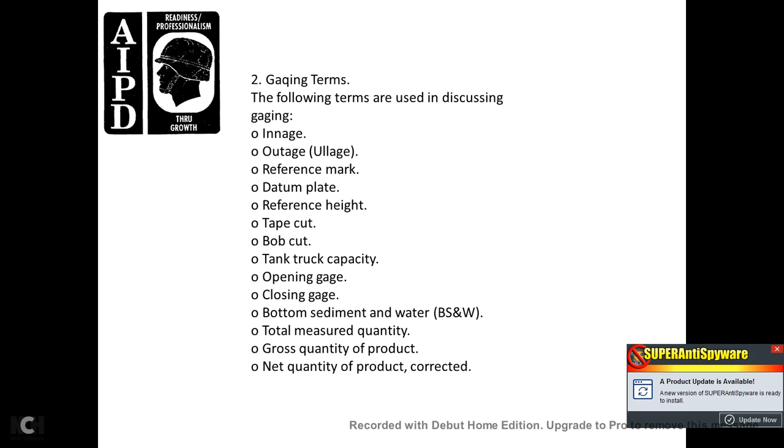The innage is the depth or height or volume of the product in the tank, measured by the gauge from the surface of the product to the bottom of the tank.

Outage or ullage. The outage or ullage is the measurement of the free space above the surface of the product in a tank, extending to the reference mark.

The reference mark is a horizontal line put on the rim of the gauging hatch on the tank, representing the fixed point from which the measurement is made.

The datum plate is a level metal plate on the tank bottom directly under the reference mark. The plate provides a smooth, level surface for the innage bob to rest upon when taking an innage gauge.

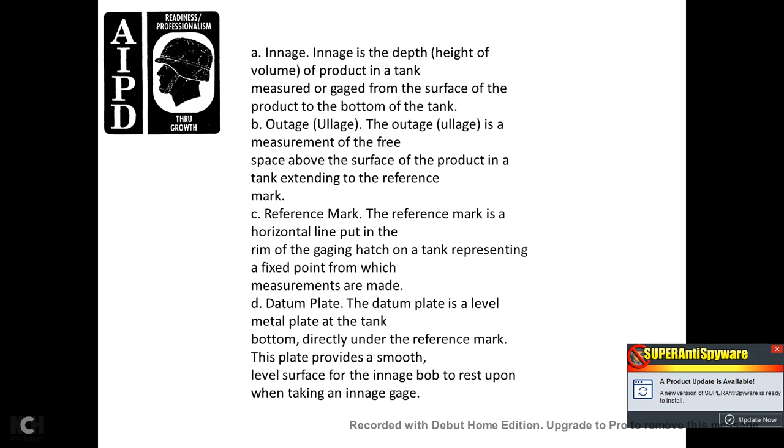Reference height. The reference height is the distance from the reference mark to the top of the datum plate. After you establish the reference height, stencil it in a conspicuous place adjacent to the gauging hatch.

Tape cut. A tape cut is the line made on the tape measuring scale by the product being measured. A bob cut is the line made on the bob by the bottom sediment and water being measured.

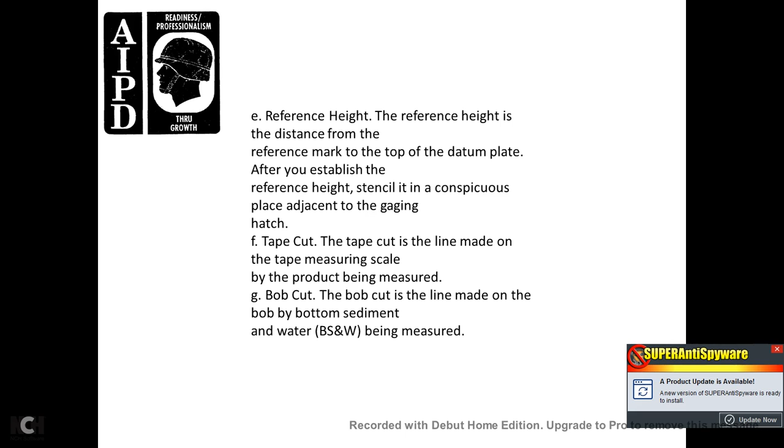Tank truck capacity. Tank truck capacity is the amount of product in the vehicle where the product reaches the adjustable marker installed beneath the dome of each compartment. Adjust the marker in relation to the type of movement, whether highway or cross country.

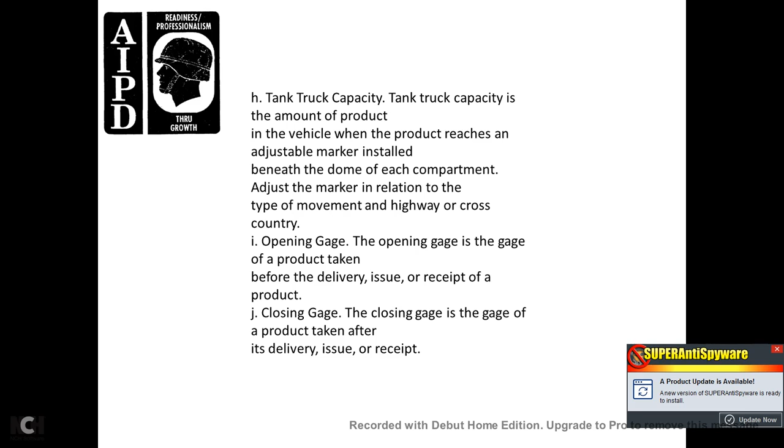Opening gauge. The opening gauge is the gauge of the product taken before delivery, issue, and receipt of the product. Closing gauge is the gauge of the product taken after delivery, issue, and receipt.

Okay, the bottom sediment and water. Bottom sediment and water, BS&W, is the amount of sediment and water measured in the bottom of the tank.

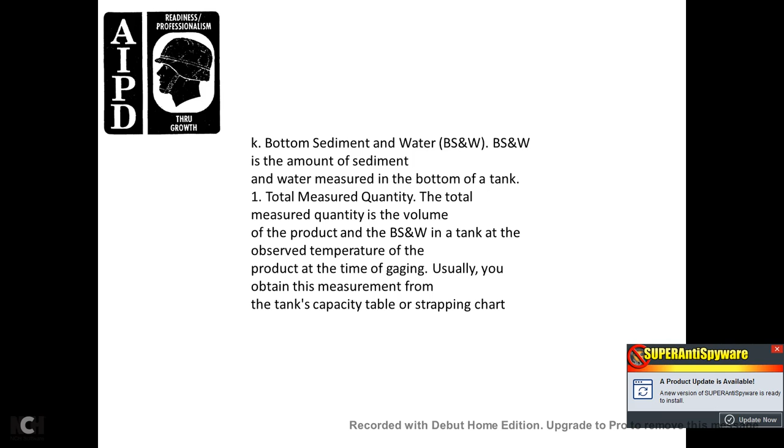The total measured quantity is the volume of the product and the bottom sediment and water in the tank, at the observed temperature of the product, at the time of the gauging. You usually obtain this measurement from the tank's capacity table or strapping chart.

Engineers develop tank strapping charts when they construct tanks. Simply, strapping charts are conversion tables that convert linear measures taken from the tape and the bob into readings of equivalent volume amounts. No two storage tanks have identical strapping charts, because tanks of the same size vary in capacity.

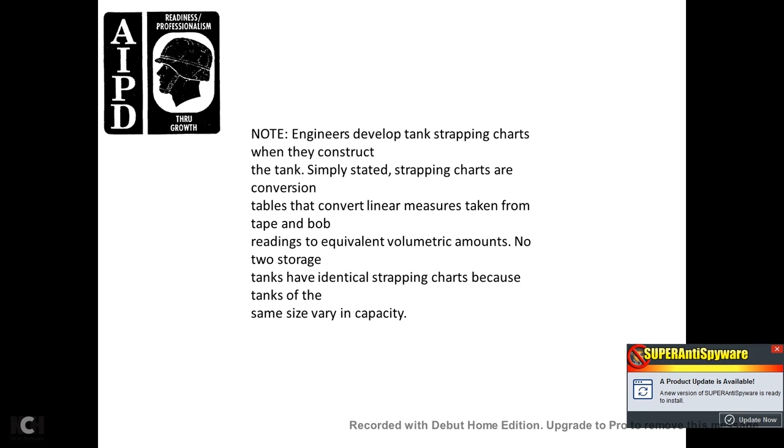Gross quantity of product. The total measured quantity minus the bottom sediment and water is the gross quantity of product, also known as the net quantity of product uncorrected. The net quantity of product corrected.

The net quantity of the product corrected is the total measured quantity of the product minus the bottom sediment water, and the observed temperature converted to an equivalent quantity of 60 degrees.

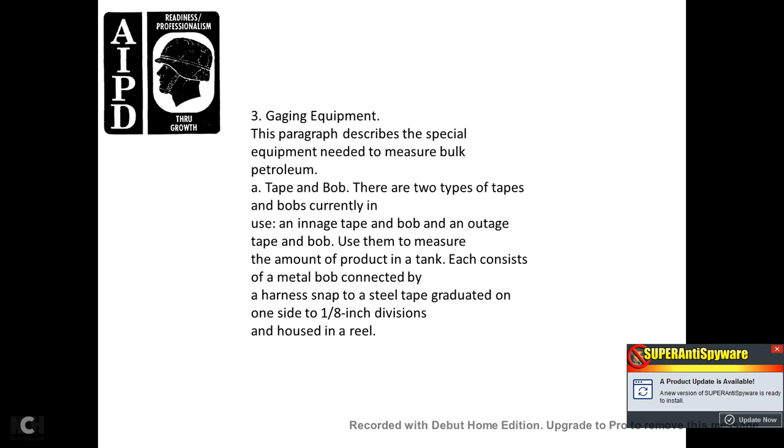Gaging equipment. This describes the special equipment needed to measure bulk petroleum: tape and bob. There are two types of tapes and bobs currently used: an innage tape and bob, and an outage tape and bob, used to measure the amount of product in a tank. Each consists of a metal bob connected by a harness snap to a steel tape, graduated on one side to 1/8 of an inch, with divisions housed in a reel.

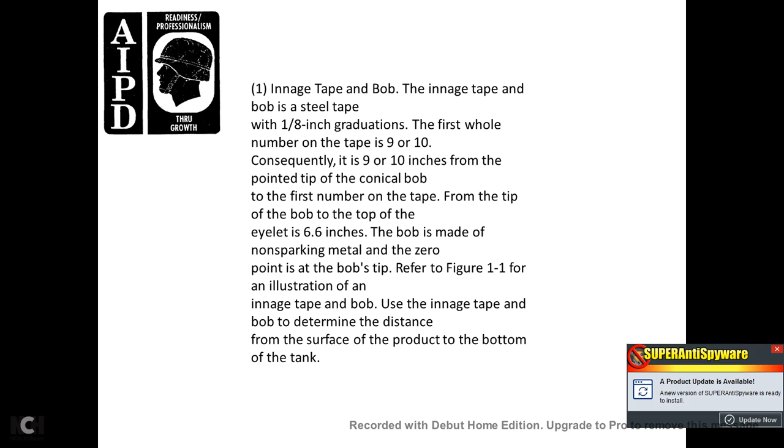The innage tape and bob. The innage tape and bob is a steel tape with 1/8 of an inch graduations. The first whole number on the tape is 9 or 10 inches from the pointed tip of the conical bob. The first number of the tape from the tip of the bob to the top of the eyelet is 6.6 inches. The bob is made of non-sparking metal, with the zero point at the bottom of the bob's tip. Refer to Figure 1-1 for an illustration of the innage tape and bob. It is used to determine the distance from the surface of the product to the bottom of the tank.

Here you see the innage tape, with the handle and crank, and the bob, which is 10 inches from the top of the tape, along with the bob, the eye, and the harness snap.

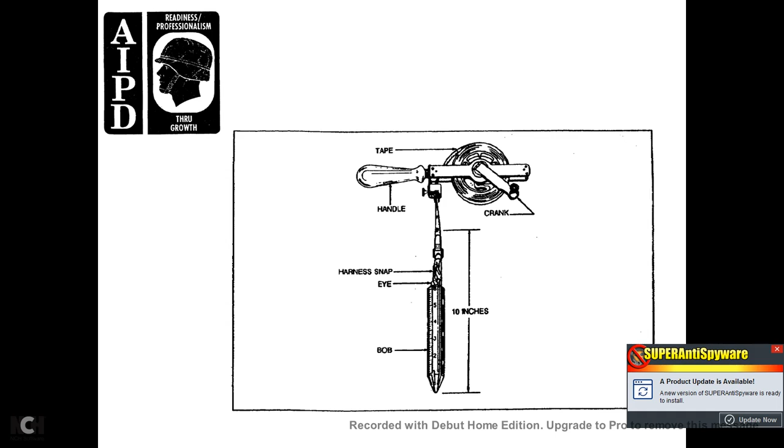Outage tape and bob. The outage tape and bob, shown in Figure 1-2, looks similar to the innage tape, except the readings are at the 3-inch level on the tape. The zero reference is where the harness snap connects to the bottom of the 6-inch long rectangular bob, graduated in 1/8 of an inch, starting with the 6-inch mark at the bottom, and reading upward to 1 inch past the last whole number on the tape at the top. The outage bob has a flat nose and is made of non-sparking metal.

Use the outage tape and bob to determine the distance from the surface of the product to the top of the tank.

Here your outage tape shows the handle, the tape, and the crank, with the bob 7 inches, then the eye, and then 3 inches from the eye to the tape, with the harness snap marking 0 inches.

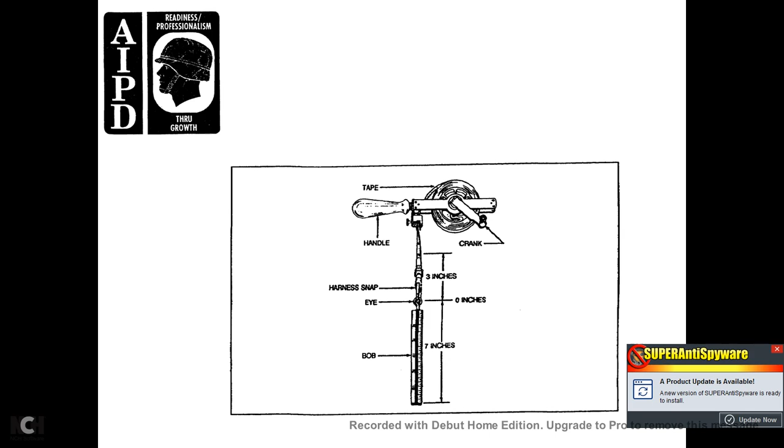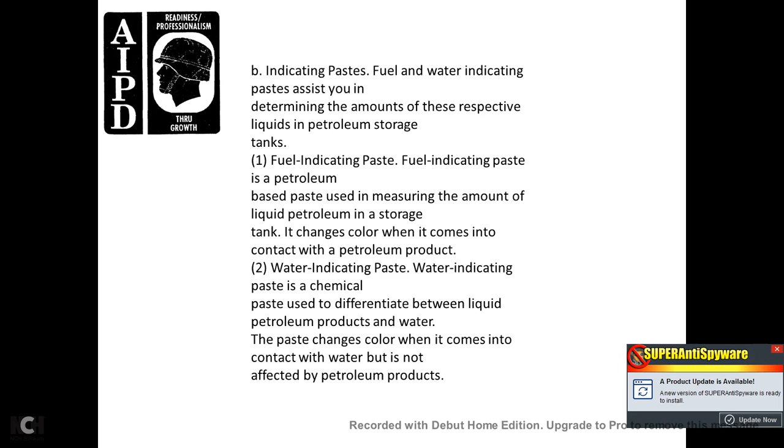Indicating paste. Fuel and water indicating paste is used to determine the amount of respective liquid in petroleum storage tanks. Fuel indicating paste is a petroleum-based paste used in measuring the amount of liquid petroleum in the storage tank; it changes color when it comes in contact with the petroleum product. Water indicating paste is a chemical paste used for differentiating between liquid petroleum products and water. The paste changes color when it comes in contact with water, but is not affected by petroleum products.

Gaging sticks are used to gauge tank cars, and tank vehicles. The tank car gauge stick is a varnished piece of wood or other corrosion-resistant material, approximately 3 feet long, used for outage gauging of tank cars. The stick has two scales graduated in 1/8 of an inch divisions, with a common zero 12 inches from the lower end. Attached to the stick is an angle; when you place the stick with the angle resting on the upper side of the tank car shell, the zero scale coincides with the underside of the shell.

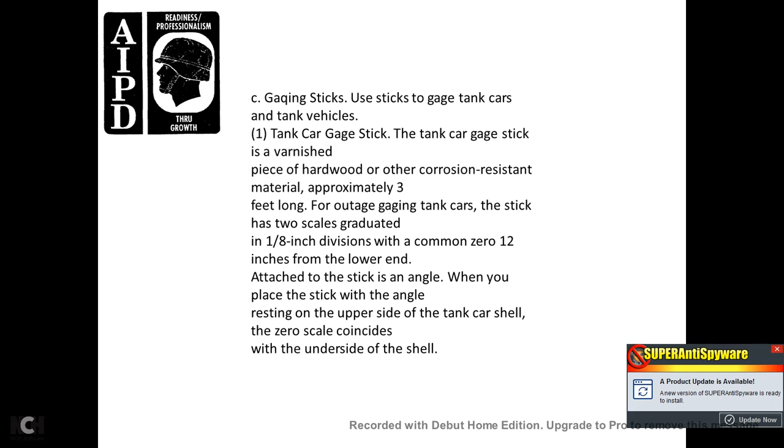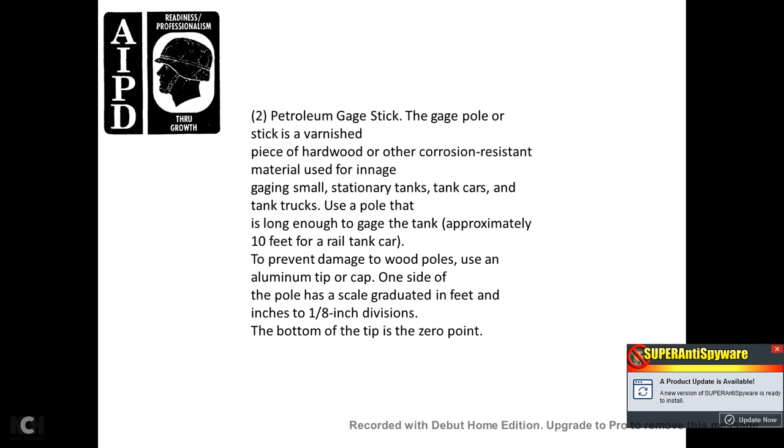The petroleum gauge stick, or gauge pole, is varnished wood or other corrosion-resistant material, used for innage gauging small stationary tanks, tank cars, and tanker trucks. It is a pole long enough to gauge the tank, approximately 10 feet for a railway tanker car. To prevent damage to the wood, an aluminum tip cap is used. One side of the pole is scaled, graduated in feet and inches to the 1/8 of an inch division, with the bottom of the tip as the zero point.

The tank vehicle gauge stick: each tank vehicle has its own gauge stick, graduated in 25-gallon divisions instead of feet and inches. When the product level falls between gallon divisions, you interpolate.

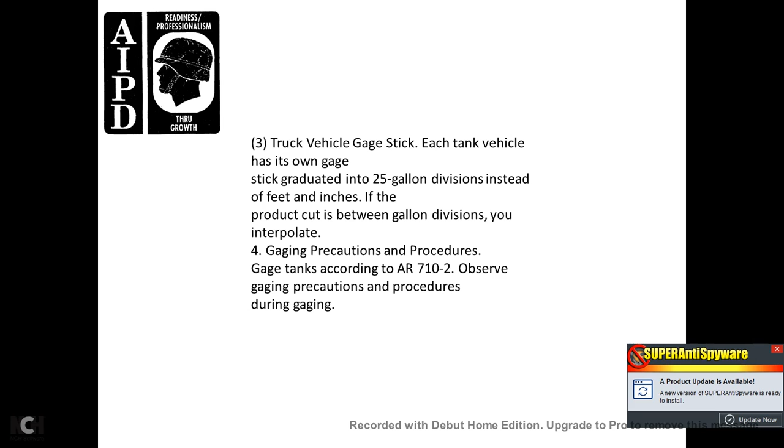Gaging precautions. Procedures for gaging tanks are according to AR 710-2. Observe gaging precautions and procedures during gaging.

Follow the precautions for gaging bulk storage tanks before and after any receipt, issue, or transfer operation. Ground the static electricity by touching the bare hand to the tank shell and handrail before climbing the tank and before performing a gauge. Open the gauge hatch to allow vapors to escape. Do not stand on the roof of the tank when gaging. Perform the gauge from the side of the gauge hatch which has the wind to your back, if possible. Be careful not to breathe the vapors from the contents of the tank.

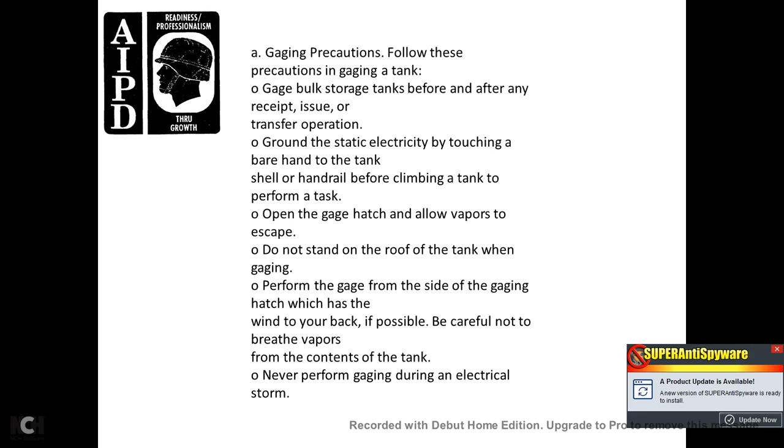Never perform gauging during an electrical storm. Require gauge personnel to stand at the same location on the roof for both the opening and closing gauges if they must gauge while standing on the tank's roof.

Perform and record gauging to the nearest 1/8 of an inch. Repeat the gauging until you get two identical readings. Be certain that the tape touches the rim of the gauge hatch at all times to ground static electricity during the gauging process. Wipe the tape clean and dry after use.

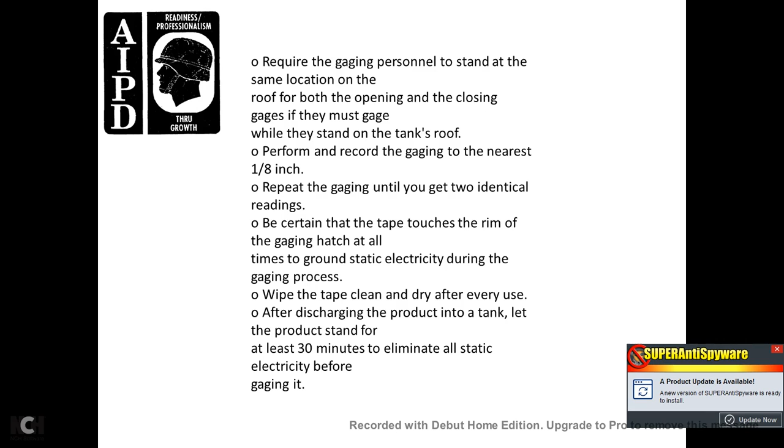After discharge of product into a tank, let the product stand for at least 30 minutes to eliminate static electricity before gauging it. Take the product temperature reading for volume correction before and after receiving or issuing volumes of 3,500 gallons or more, using the same tape and bob for opening and closing gauges.

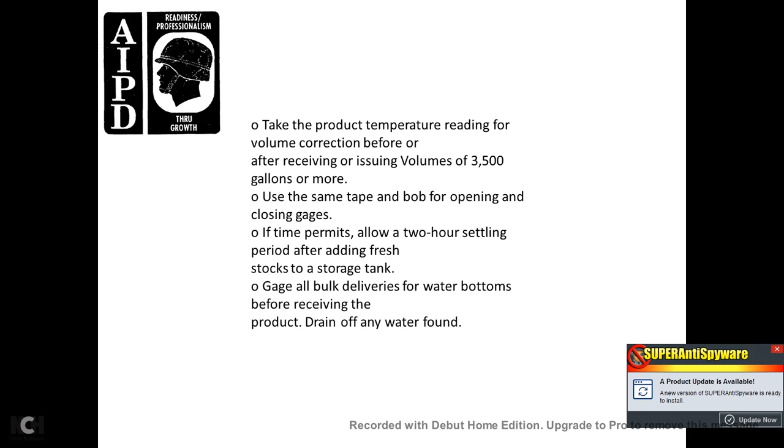If time permits, allow a 2-hour settling period after adding fresh stock to a storage tank. Gauge all bulk deliveries for water bottoms before receiving the product, and drain off any water found.

Innage gauging: using an innage tape and bottom bob to obtain the height of the product in the tank. Follow these steps to perform innage gauging using an innage tape and bob. This method directs gauging of atmospheric or other non-pressure tanks.

Raise the appropriate hatch cover. Locate the reference point shown in Figure 1.3, marked as point A. Apply the water-indicating paste to the bob, not the graduation portion.

Apply the product-indicating paste to the tape at the level of the product in the tank, applying it thinly along the graduated side of the tape. Ensure you hold the ungraduated side of the tape in contact with the metal rim of the gauging hatch at the reference point as you lower the tape into the tank.

This shows the innage tape going in at the reference point at the top of the lid, following the innage tape with the product tape cut. Product level aligns with reference height: A, B, and C represent the bottom, with B being the product level and A the reference point at the top.

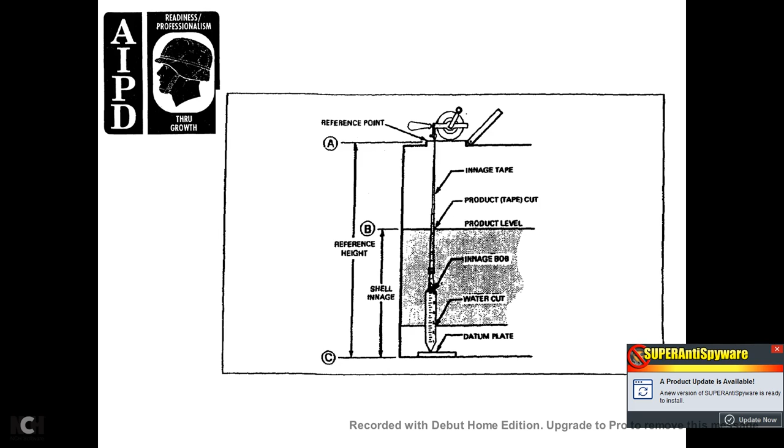Following the innage tape to where the product cuts the tape at the product level, lower the bob and tape into the tank until the tip of the bob just touches the tank bottom or datum plate, at the horizontal plane of point C.

If you lower the tape too far, the bob tilts and you obtain an incorrect reading. Compare the tape reading to the reference point A in Figure 1.3, to the reference height.

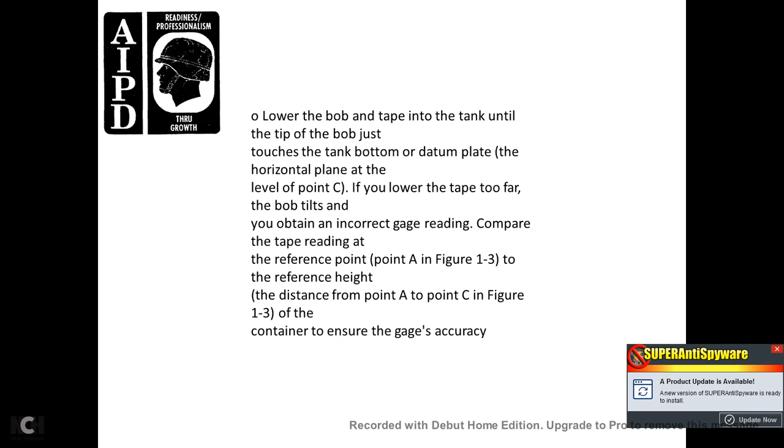Compare the tape reading to the reference point A in Figure 1.3 to the reference height, the distance from point A to point C in Figure 1.3 of the container, to ensure gauge accuracy.

Withdraw the tape after 30 seconds and read and record the product tape cut on the innage gauge. Read and record the water cut on the bob for bottom sediment and water.

Ensure you obtain identical readings to gain accurate measurement using the same gauge and gauging the hatches, obtaining the opening and closing gauges. Be sure to lower the tape to the same depth on both gauges.

The outage gauge method: when gauging barges, tankers, or tank cars, also use the outage gauge method to obtain the amount of ullage space remaining in the tank. You should use all safety precautions.

You may use this method on a storage tank when necessary to get an outage or ullage measurement, using an outage tape or bob. Follow these steps.

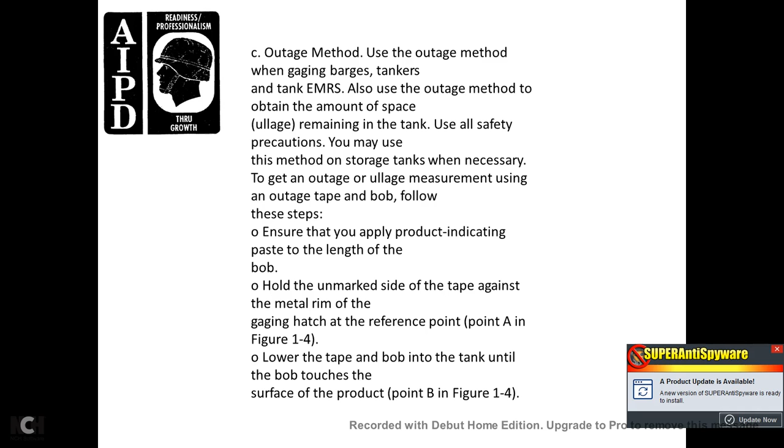Ensure that you apply the product-indicating paste along the bob. Hold the unmarked side of the tape against the metal rim of the gauging hatch at the reference point A in Figure 1.4. Lower the tape and bob into the tank until the bob touches the surface of the product at point B in Figure 1.4.

Wait until the bob is motionless. Lower the tape slowly until the bob is 2 or 3 inches below the product surface at point B, as shown in Figure 1.4, penetrating the product surface. Record the reading of the tape at the reference point A in Figure 1.4.

Add the bob reading to the tape reading to get the outage gauge. Subtract the outage gauge from the reference height of the tank to get the converted outage gauge into the inch gauge.

Follow the example shown for how to perform this step. Example: using 1/4 inch readings, the tape reading at reference point is 21 feet 6 inches, the bob reading is plus 3 3/4 inches, and the outage gauge is 21 feet 9 3/4 inches.

That gives plus 3 3/4 inch bob reading. All right, you have your

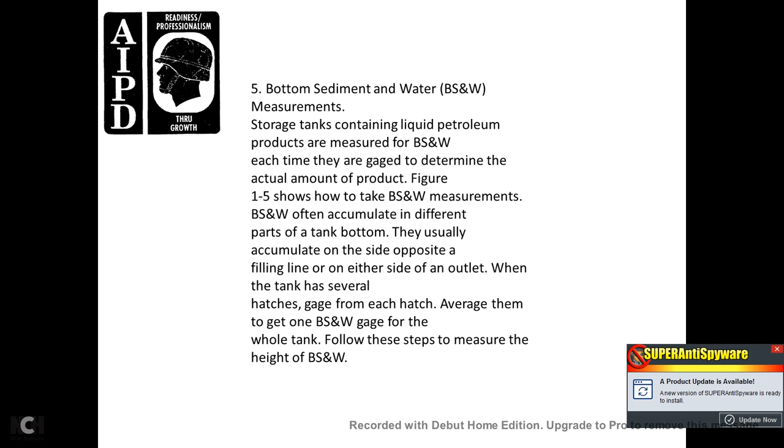They usually accumulate on the side opposite the filling line, or on either side of the outlet. When the tank has several hatches, gauge from each hatch and average them to get the bottom sediment water gauge for the whole tank. Follow these steps to measure the height of the bottom sediment water.

Use the water indicating paste to determine the water. Put a thin, even coat of paste on the part of the bob that touches the point where the water and product meet. Be careful not to put on too much, as this can cause a false reading.

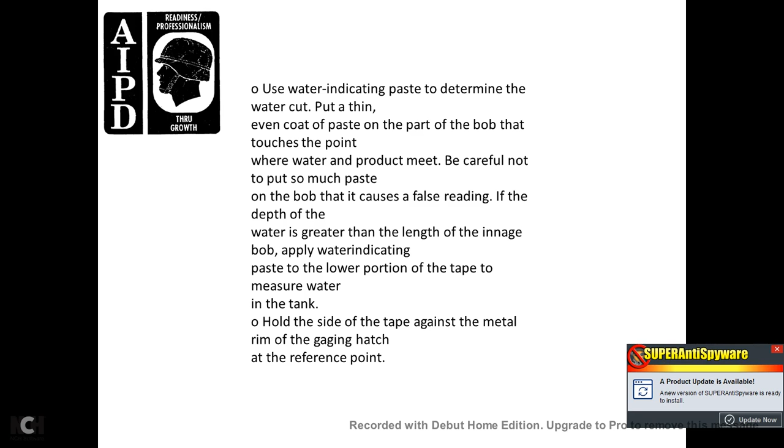If the depth of the water is greater than the length of the innage bob, apply the water indicating paste to the lower portion of the tape. Measure the water in the tank. Hold the side of the tape against the metal rim of the gauging hatch at the reference point.

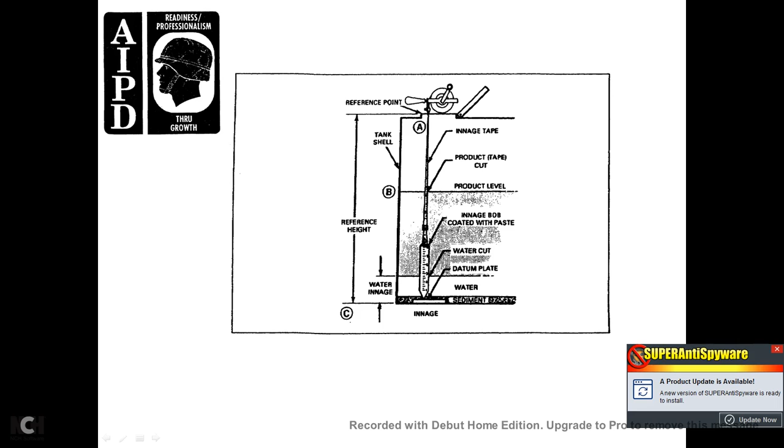From A to B, you have the innage tape, the product tape cut, the product level. From B to C, you have the water innage, sediment and water, and your water measurement from the datum plate on the gauge, coated with paste showing the water cut. And then to the product level, if there is any water past the bob, then coat the tape.

Lower the tape or bob into the tank until the bob is near the distance of the bottom. Determine this by comparing the length of the unwound tape with the reference height of the tank.

Unwind the tape slowly until the tip of the bob touches the bottom of the tank's datum plate. Do not let the bob rest on a rivet or other obstruction. Do not lower the tape so far into the tank that the bob tilts, causing an incorrect reading.

Keep the tape and bob in the gaging position at 5 to 10 seconds for kerosene, gasoline, or other light products, and 15 to 30 seconds for heavier products. When removing the tape and bob from the tank, the bob surface in the water should show discoloration. Record the water cut as the bottom sediment and water.

Temperature matters because the volume of petroleum products increases and decreases with temperature change. An accurate measurement of the temperature of the product is taken when you gauge it, so you can correct the measured quantity to the standard temperature of 60 degrees Fahrenheit, for volumes over 3,500 gallons.

When gauging large quantities, you take temperature readings at various levels to average and determine the true temperature of the product. Figure 1.6 shows the number of readings necessary and the levels at which to place the tank thermometers. For a product depth of more than 15 feet, the minimum number of temperature measurements is three: 3 feet below the surface, the middle of the product, and 3 feet above the bottom.

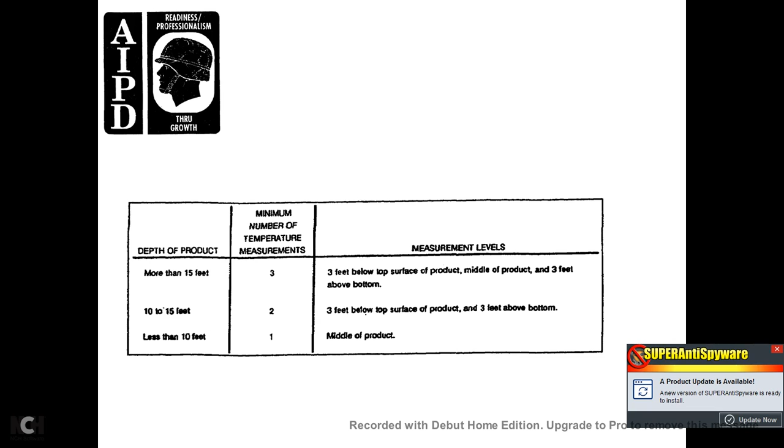For a depth of 10 to 15 feet, the minimum number of temperature measures is two: 3 feet from the surface of the product and 3 feet from the bottom. For less than 10 feet, take one temperature reading from the middle of the product.

Use the cup case thermometer to measure the temperature of the product in the storage tank. The thermometer is attached to a hardwood backing, with the bulb of the mercury column extended within the cup base. When filled with liquid of the product being measured, the cup case minimizes fluctuation of the reading.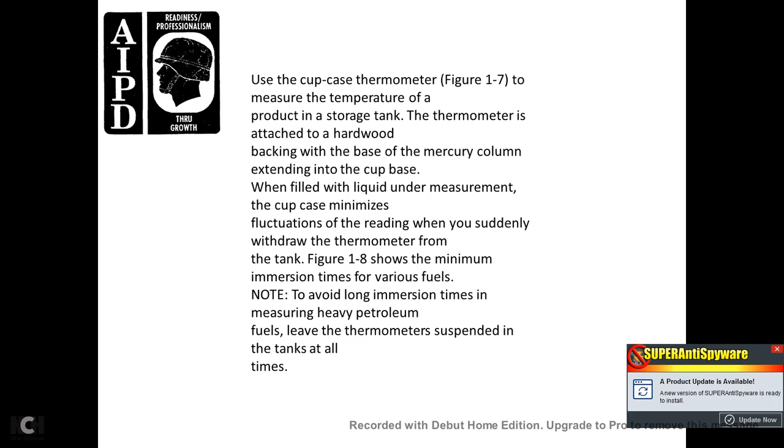When suddenly withdrawn from the tank, Figure 1.8 shows the minimum immersion time for various fuels. To avoid the long immersion time when measuring heavy petroleum fuels, leave the thermometer suspended in the tank at all times. Follow these procedures whenever you're measuring the temperature.

Examine the mercury column of each cup case thermometer for separation, and replace any thermometer having a faulty column. Mercury separations cause incorrect readings.

Inspect thermometers for accuracy by exposing them as a group to the same atmospheric temperature and comparing the readings. Replace any thermometer with a reading that differs from the group by 1 degree Fahrenheit or more. Prove all tank thermometers against the reference standard each year.

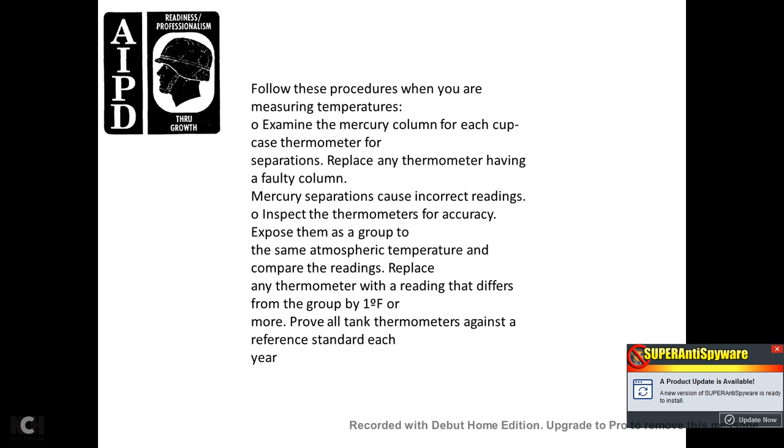This shows your cup case with the thermometer in it: approximately 16 inches, approximately 1 and 1/8 inches, and 2 inches.

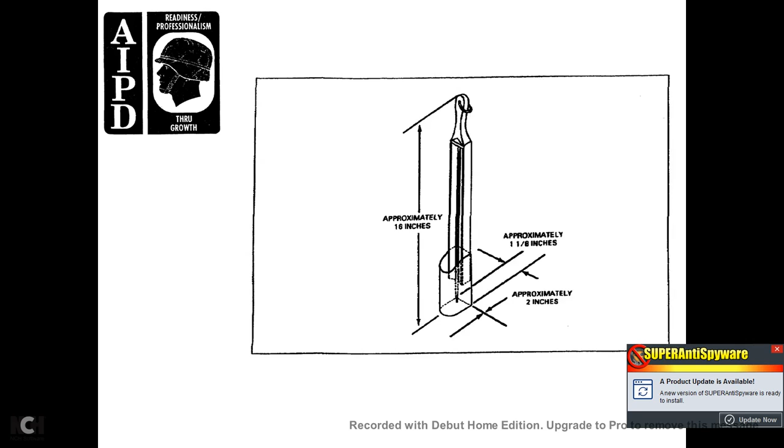For automotive gasoline, motor gas, aviation gas, kerosene, diesel fuel, jet fuel, and grades 1 and 2 burner fuels, it takes 5 minutes. For grades 4, 5, and 6 Navy special burner fuels, it takes 15 minutes. This conforms to Table 4, minimum immersion time of the cup case, API standard 2543, ASTM designation D1086.

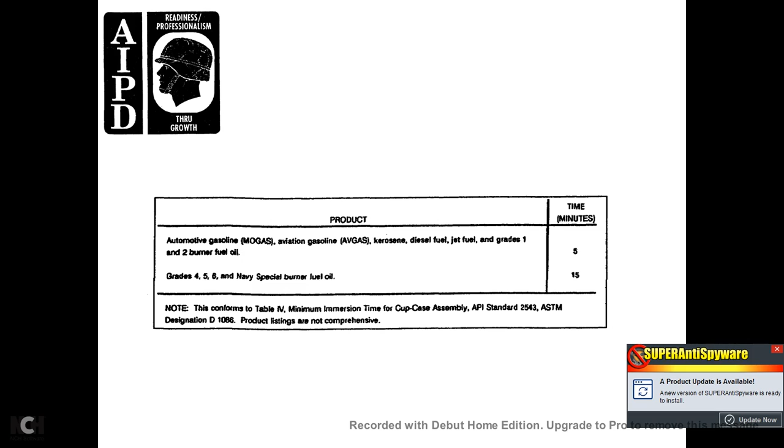Using Figure 1.6 to determine the minimum number of readings and measurement levels required for the operation, find the true average temperature of the product. Attach the thermometer to the end of the gauge tape with a chain or cord.

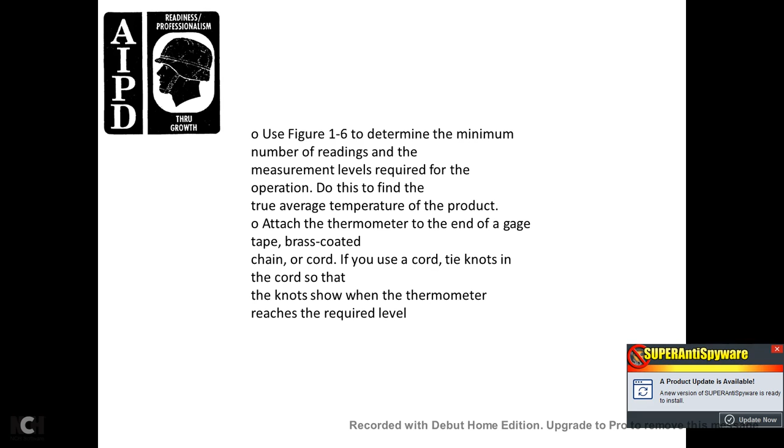Tie knots in the cord so that the knots show whenever the thermometer reaches the required level. Lower the thermometer to the required level and leave it there for the amount of time shown in Figure 1.8.

Then take the thermometer out of the tank and read it at once. Shelter the cup below the hatch to reduce temperature change caused by the wind and atmosphere when you withdraw the full cup of the product from the tank. When taking the reading, do not spill it.

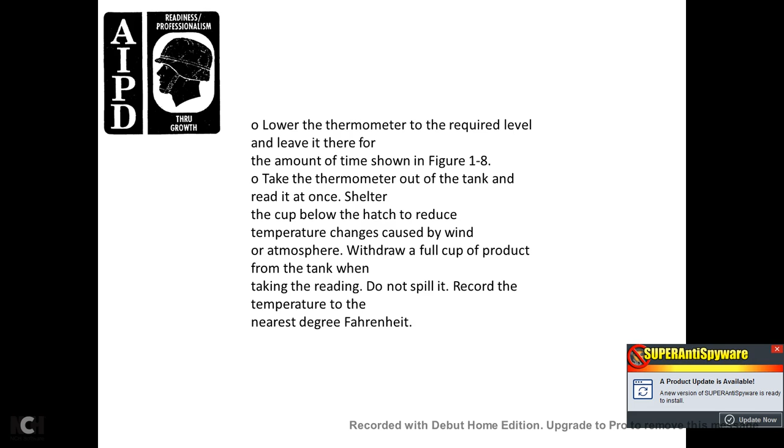Record the temperature to the nearest degree Fahrenheit. When gauging large quantities, take several temperature readings at various depths, then divide the sum of the readings by the number of readings to get the true average temperature of the product.

For example, assume the tank contains 20 feet of product. Take temperature readings at 3 feet below the top surface of the product, at the middle of the product, and at 3 feet above the bottom. Assume your readings are 82, 81, and 80 degrees Fahrenheit.

Divide the sum of these readings by 3, the number of readings, to get the average true temperature of the product: 82 plus 81 plus 80 equals 243, divided by 3 is 81 degrees Fahrenheit. So 81 degrees Fahrenheit is the true average temperature of the product in the sample.

Volume calculations: perform volume calculations for quantities of fuel of 3,500 gallons or more, or for lesser quantities when directed by higher headquarters. Follow these steps to calculate volume.

Obtain the total measured quantity from the tank capacity tables. Obtain the bottom sediment and water measured quantity from the tank capacity table. Subtract the bottom sediment and water measured quantity from the total measured quantity to get the net volume of the product, uncorrected.

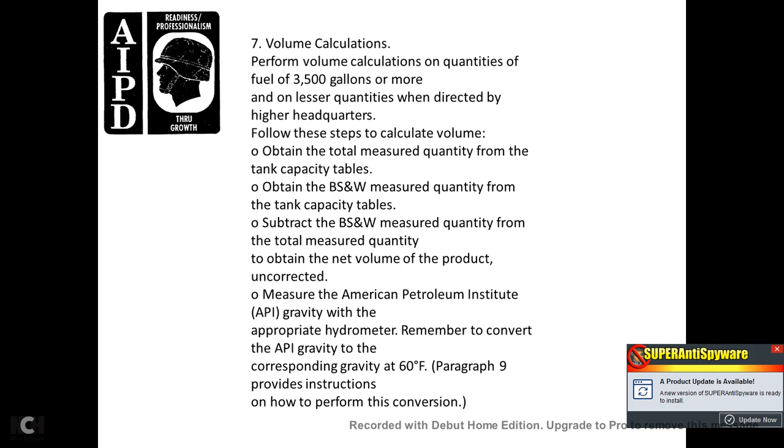Measure the American Petroleum Institute gravity of the product with the hydrometer. Remember to convert the API gravity to the corresponding gravity at 60 degrees Fahrenheit. Instructions on how to perform this conversion are found in paragraph 9.

Using the fuel classification and API gravity test procedures: draw 300 milliliters of the sample fuel, take the sample to a sheltered place to test it, shake the sample to mix it, then slowly pour the sample into a clean, dry hydrometer cylinder.

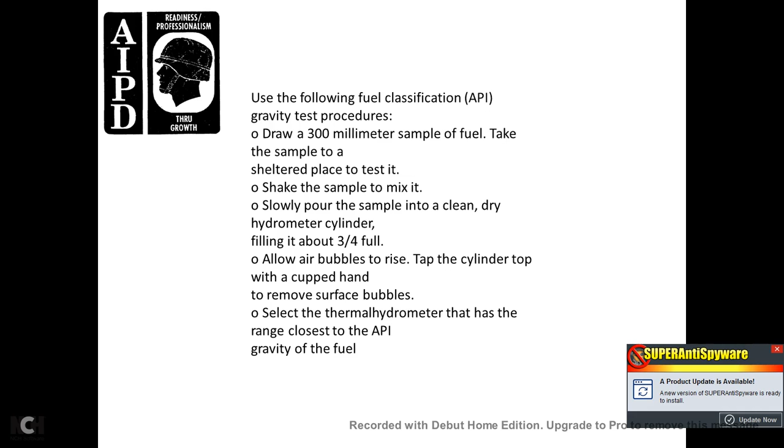Spin the thermal hydrometer to let it come to rest in the middle of the cylinder, away from the sides. Wait for the thermal hydrometer float to settle away from the side, then read the nearest scale division.

Point your eye slightly below the level of the liquid, then raise it slowly until the surface of the liquid appears level. Record the reading and the observed temperature on the thermal hydrometer. The two readings you take are the observed API and the temperature.

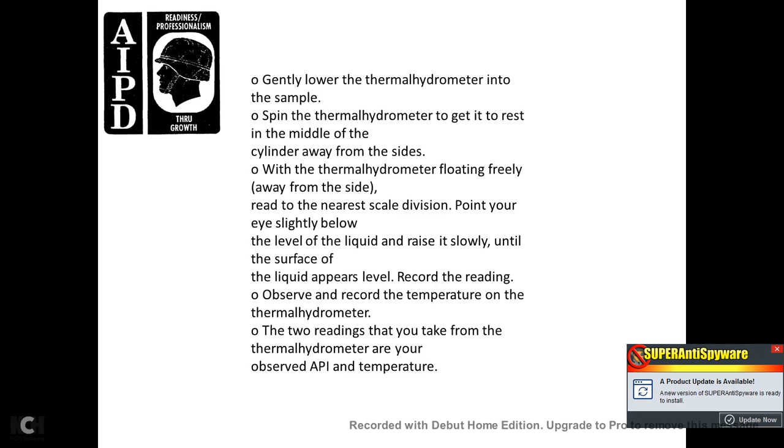The DA Form 3853-1 innage gauge sheet, shown in Figure 1-9, is used to record the opening and closing gauge, the lineal reading, the volumetric equivalent in gallons, and the observed API used for correcting quantities at 60 degrees Fahrenheit. Keep this form on file for each gauging and each inventory as backup data.

Now for paragraph 9: observed gravity correction. Take the API gravity with the correct hydrometer listed in Figure 1-10. The hydrometer gives the API gravity reading.

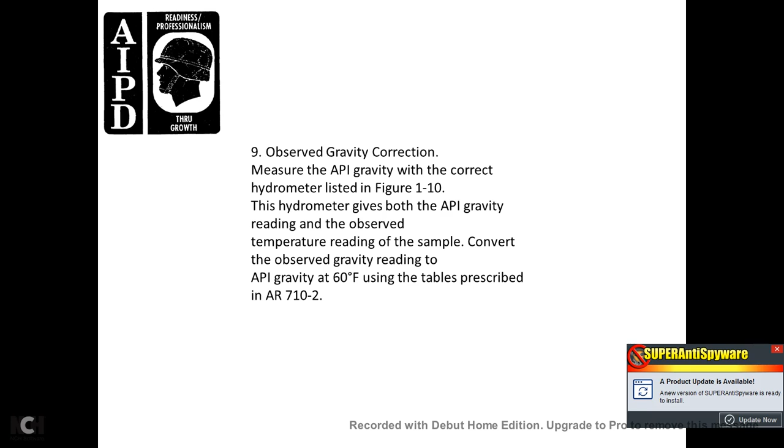Observe the temperature reading with the sample, then convert the observed gravity reading to API gravity at 60 degrees Fahrenheit using the tables prescribed in AR 710-2.

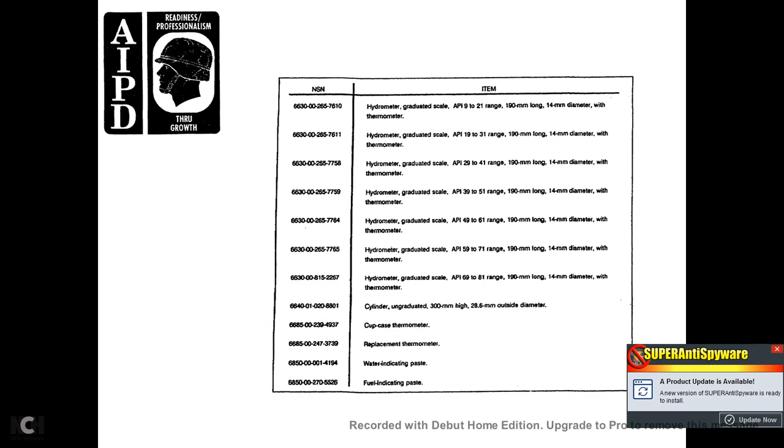Fuel classification: to classify the fuels, follow these steps. Compare the corrected API gravity to the API gravity range for the particular product.

If the corrected API gravity compares lower or higher than the product's gravity range, the test results indicate a possibility of commingling with a heavier or lighter product.

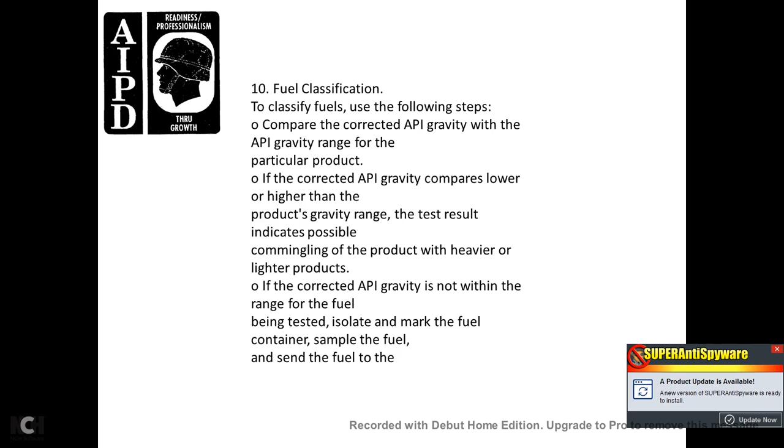If the corrected API gravity is not within the range of the fuel being tested, isolate and mark the container and the fuel sample, and send the fuel to the supporting laboratory for analysis. Do not use the fuel until receiving disposition instructions.

Volume correction: the volume of liquid petroleum products changes because of changes in temperature. When the temperature of the product increases, the volume of the product increases. When the temperature decreases, the volume of the product decreases.

Therefore, correct the gauged volumes in excess of 3,500 gallons to account for this change in volume. The standard temperature for measuring the volume of a petroleum product is 60 degrees Fahrenheit.

When measuring a petroleum product at volumes exceeding 3,500 gallons, correct the measurement to what it would have been at 60 degrees Fahrenheit.

For example, at a temperature greater than 60 degrees Fahrenheit, your measurement shows more product than there would be at 60 degrees Fahrenheit, so you adjust the measurement accordingly.

Likewise, at a temperature less than 60 degrees Fahrenheit, you might measure less product than there would be at the standard 60 degrees Fahrenheit, so you add to the reading to reach the standard. Follow these steps to make the volume correction.

Gross volume is the total quantity of the petroleum product including bottom sediment and water. Net uncorrected volume is the measured quantity of product minus the bottom sediment and water, observed at the temperature before conversion to the equivalent quantity at 60 degrees Fahrenheit or 15 degrees Celsius.

Make sure all tanks have individual strapping charts and calibration tables showing the volume of product in the tank by foot and inch, including fractions of an inch, usually to the nearest eighth, to determine the total measured quantity of product and bottom sediment water in the tank.

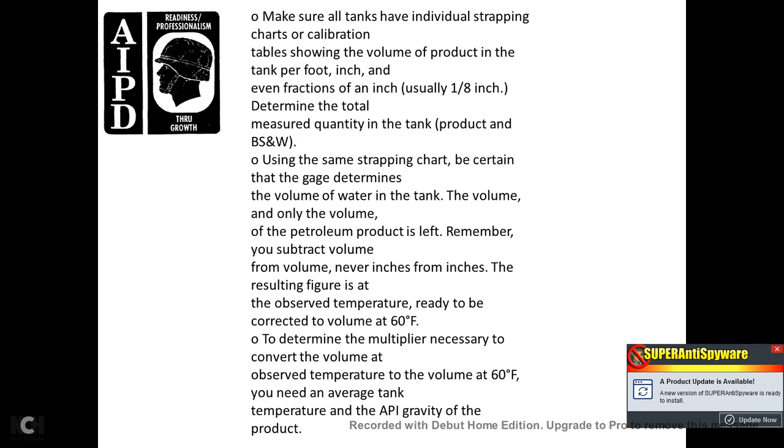To determine the multiplier necessary to convert the observed volume to the volume at 60 degrees Fahrenheit, you need to average the tank temperature and API gravity of the product. Use the following example to make the volume corrections.

Innage gauge, tank capacity 500 barrels, tape reading 6 foot 3 1/4 inches, bob reading 1 inch, measured tank temperature 67.5 degrees, API gravity at 60 degrees Fahrenheit 56.3, converting gauge readings to gallons.

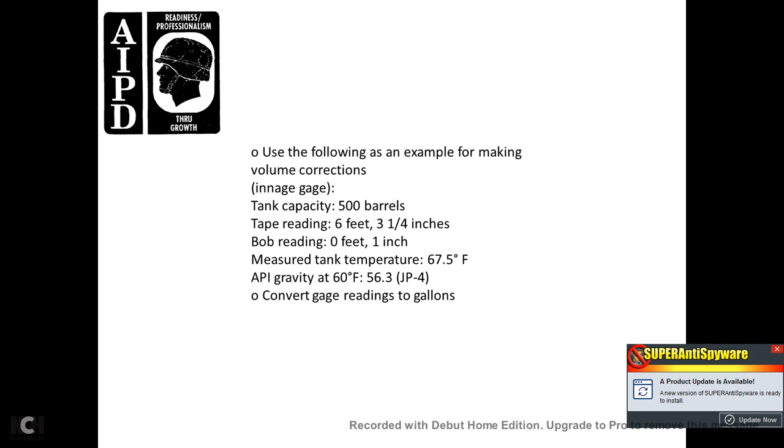Refer to figure 1-11, convert the bob cut of 0 feet 1 inch to 5.41 barrels. There are 42 gallons per barrel. To calculate the number of gallons, multiply 5.41 times 42 gallons per barrel, which results in 227.22 gallons.

Note that in actual practice, you refer to the chart for the specific tank being gauged.

Refer to figure 1-11 to convert the tape cut to 6 feet 3 1/4 inches. Since the figure does not list 6 foot 3 1/4 inches exactly, you need the quantities for 6 feet, then 3 inches, and then 1/4 inch, then add the quantities.

Figure 1-11 shows 389.48 barrels for 6 feet, 16.23 barrels for 3 inches, and 1.35 barrels for 1/4 inch.

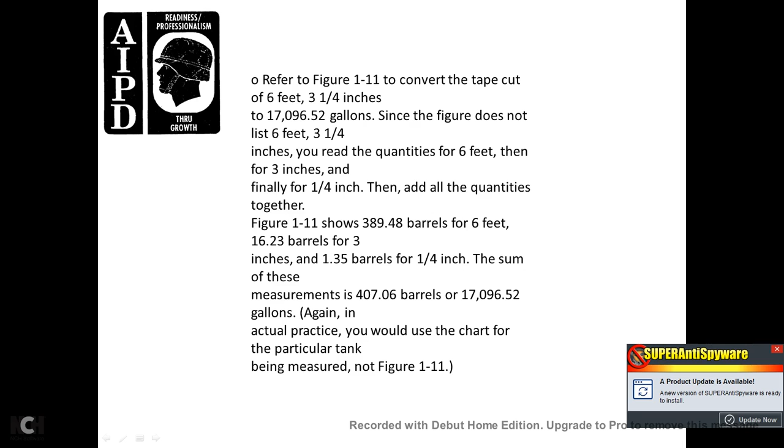The sum of these measurements is 407.06 barrels, or 17,096.52 gallons. Again, in actual practice you would use the chart for the particular tank being measured, not figure 1-11.

Note that you have now determined the uncorrected volume of the tank. To find the tank's corrected volume, find the volume correction factor using figure 1-12.

In order to use the factor, you must know the API gravity of the product at 60 degrees Fahrenheit, rounded off to the nearest half of a degree. If the problem gives API gravity 56.3, round this figure to 56.5.

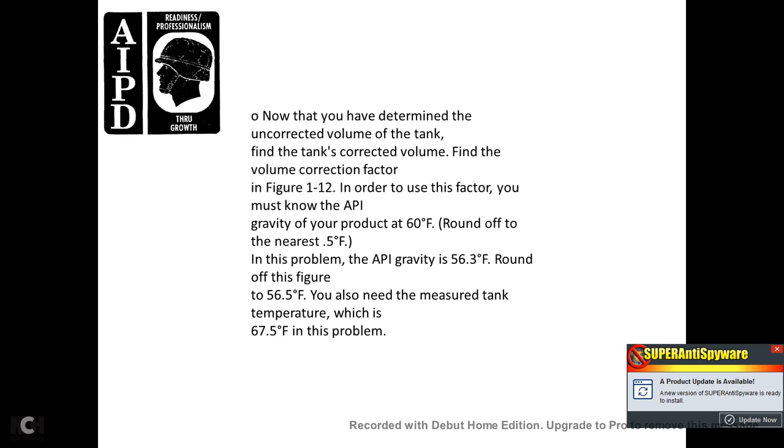You need the measured tank temperature, which is 67.5 in this problem. Locate the tank temperature 67.5 in the left-hand column of the volume correction table, figure 1-12. Go across to the rounded API gravity measurement of 56.5.

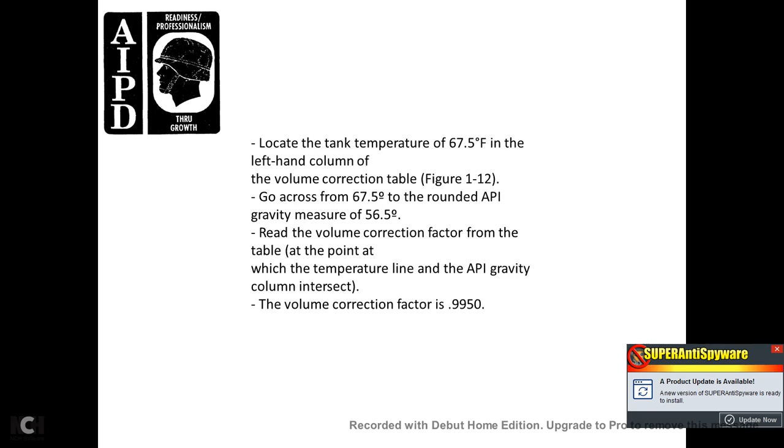Read the volume correction factor from the table at the point where the temperature line and the API gravity column intersect. The volume correction factor is 0.9950. Subtract the volume of the bottom sediment and water.

Subtract 227.22 from the gross volume of 17,096.52 to obtain the uncorrected value: 17,096.52 gross, minus 227.22 bottom sediment and water, gives 16,869.3 for the uncorrected volume.

Multiply the uncorrected volume, 16,869.3, by the volume correction factor of 0.9950, and you get 16,784.953. Round off to the nearest gallon to report 16,785 gallons as the corrected volume.

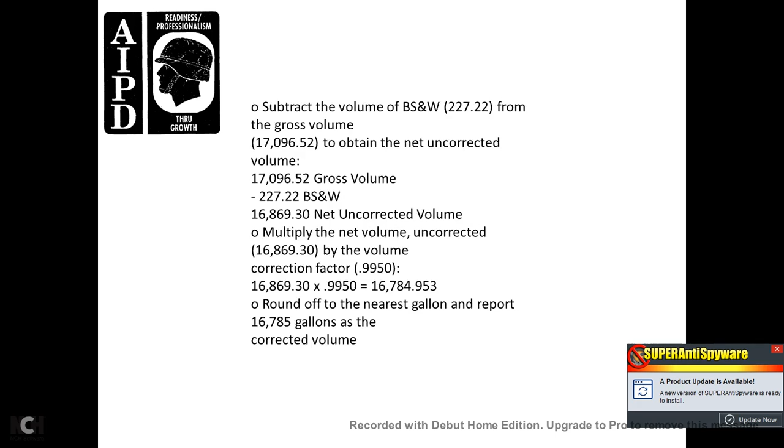Lesson 2, sampling petroleum storage tanks.

The subcourse requires the quartermaster to be able to identify the different sampling procedures and determine the procedure for use in various situations. As a petroleum management officer, you must learn to supervise the sampling of various petroleum products. This lesson provides instruction in these areas.

In general, the importance of sampling cannot be overemphasized. The sample is used to determine the quality of the petroleum product. A sample is a small amount of petroleum which represents the whole product.

Refer to the extract of field manual 10-18 shown in appendix B for the requirements of testing and sampling petroleum products. This extract also includes the minimum frequency for such testing according to the product, bulk, and packaging.

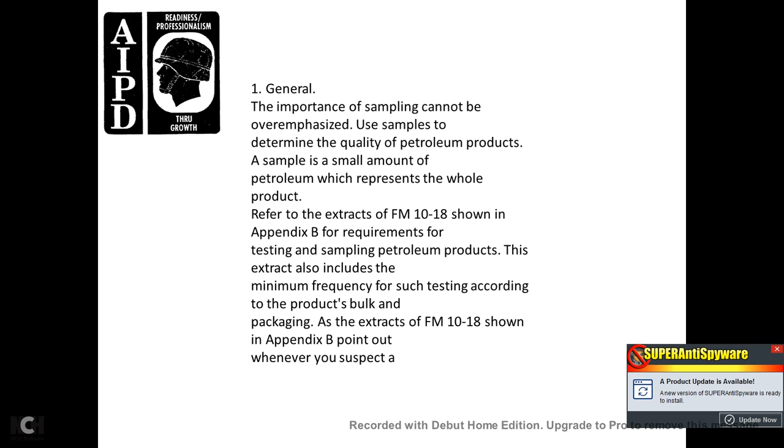As the extract of field manual 10-18 shown in appendix B points out, whenever you suspect a product of being off specification, testing and sampling the product uses testing type A and testing type B.

Note that after using the sampling equipment to obtain a representative sample of the different petroleum products from the various petroleum containers, ensure that personnel operating the base laboratory, mobile laboratory, or petroleum testing kit inspect, test, and sample to determine whether or not they meet specifications.

Type of sample: the paragraph defines the following types of samples: top, upper, middle, lower, bottom, all levels, spot, composite, single tank composite, multiple tank composite, outlet, average, and running/continuous.

Top sample: use the bottle or beaker to take the sample at the top, approximately 6 inches below the surface of the tank contents.

Upper: a bottle or beaker sample taken at the upper level, from the middle of the top third of the product. Middle: the use of a bottle or beaker sample taken from the middle of the product cut. Lower: the use of a bottle or beaker sample taken from the middle of the bottom third of the cut.

The bottom sample: use a bacon bomb thief sampler to make a bottom sample of the material, the product at the bottom of the tank.

All levels: take all-level samples submerged with the closed bottle or beaker sampler, all the way down to the bottom of the tank or container. Then open the sampler and raise it at a uniform rate so that it is 75 to 85% full when it comes out of the liquid.

A spot sample: to take a spot sample, place it at a specific location in the tank.

A composite sample combines individual samples representing the bulk, and these composite samples can be single tank or multiple tank composites.

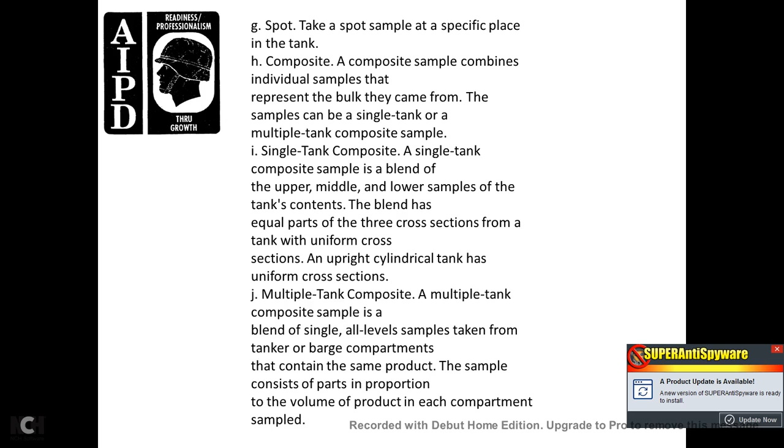Multiple tank composites: a multiple tank composite sample is blended from the single and all-level samples taken from each tanker or barge compartment that contains the product. The composite sample consists of a proportion of the volume of product in each of the compartments sampled.

Outlet: the bottle or beaker sample taken at the outlet, at the level of the tank outlet, whether it's a fixed or swing line.

The average sample consists of proportional parts from all sections of the tank.

The drain sample: take a drain sample from the draw-off or discharge valve.

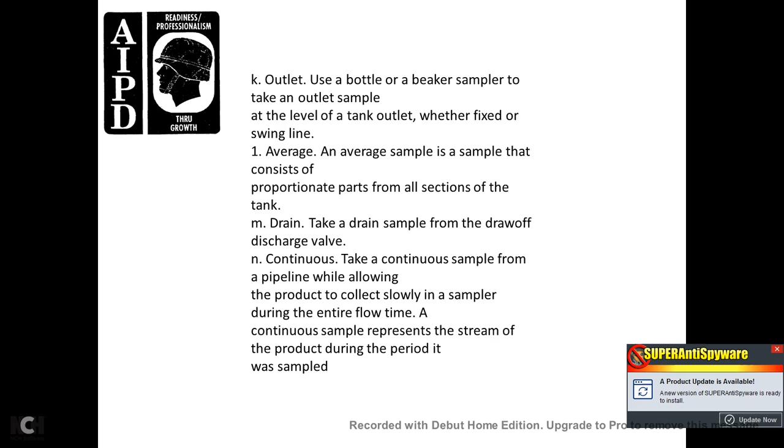A continuous sample from the pipeline allows the product to collect slowly in a sampler during the entire flow. The continuous sample represents the product stream during the period it was sampled.

Safety: due to the volatility of petroleum products, use caution when drawing off a sample. Draw samples only in the manner prescribed in this subcourse. Whenever working at a petroleum facility, always consider fire prevention.

Sampling procedures: obtain a sample that represents the entire quantity of the product. Unless you do so, the analysis of your product will reflect the quality of only a portion of the whole substance, and the quality reflected may be better or worse than the true quality of the product as a whole.

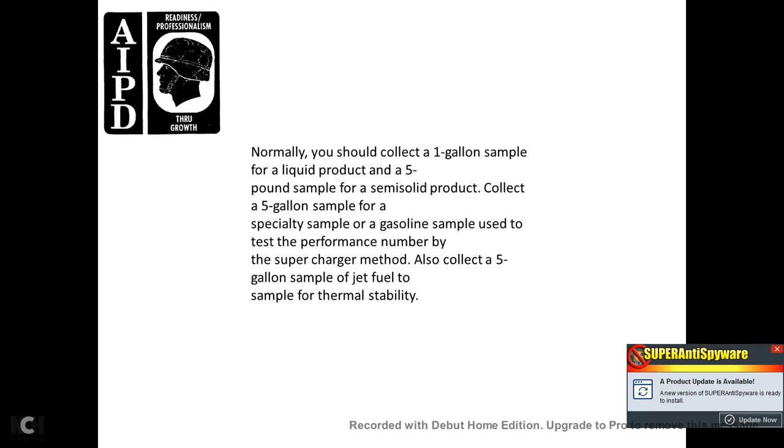Normally you should collect a 1-gallon sample for liquid products or a 5-pound sample for semi-solid products. Collect a 5-gallon sample when specifically sampling gasoline, using the test performance number supercharger method. Also collect a 5-gallon sample of jet fuel to test thermal stability.

Use a standard sampler as described in the paragraph best suited to the product and the container or carrier. Use an improvised sampler when the sample opening is too small to use a standard sampler. In any case, be sure you have a clean sampler made of material that cannot contaminate the sample. Samplers are described later in this lesson.

Clean the sampler and sample container by rinsing them with the product being sampled. However, do not rinse the items with the product if you are taking a sample for particulate contamination or sediment.

For product sample shipment, protect gasoline, jet fuel, and kerosene samples from direct sunlight using brown bottles or cans, or by covering clear bottles with paper or foil. Keep bottles of gasoline or JP cool, below 30 degrees Fahrenheit if possible, to prevent loss of light ends. Protect samples containing lead additives from sunlight.

Assign a serial number to each sample: enter the number for the sample using the last two digits of the calendar year followed by the sample number for that year. For example, number 88-1 is the first sample for the activity in 1988. Number 88-2 is the next sample.

Keep a station log as a record of samples submitted to the designated testing laboratory. Maintaining a laboratory log provides a permanent record of samples received for testing. Enter on the log: the date, the type of product, the sample unit number, the source of the sample, the quantity of the sample, the sample number, the sampler's name, the date of the sample, and the date of completion of the test.

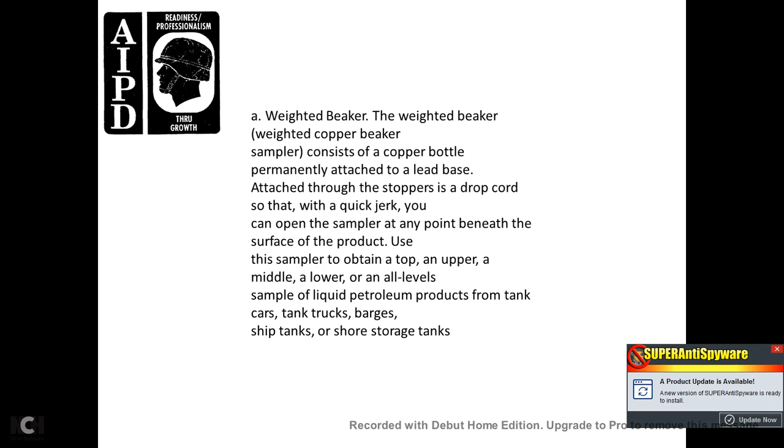A weighted beaker sampler consists of a copper bottle permanently attached to a lead base, attached with the stopper and drop cord, so that a quick jerk can open the sampler at any level beneath the surface of the product. The sampler is used to obtain top, upper, middle, and lower level samples of liquid petroleum products from tank cars, tanker trucks, barges, ship tanks, and shore storage tanks.

The drum thief is a plastic cylinder. The tube type sampler consists of a single piece of plastic tube 39.5 inches long and 1.5 inches in diameter. The tube has two finger rings at the upper end and may have three supporting legs at the bottom. Both ends of the tube have openings.

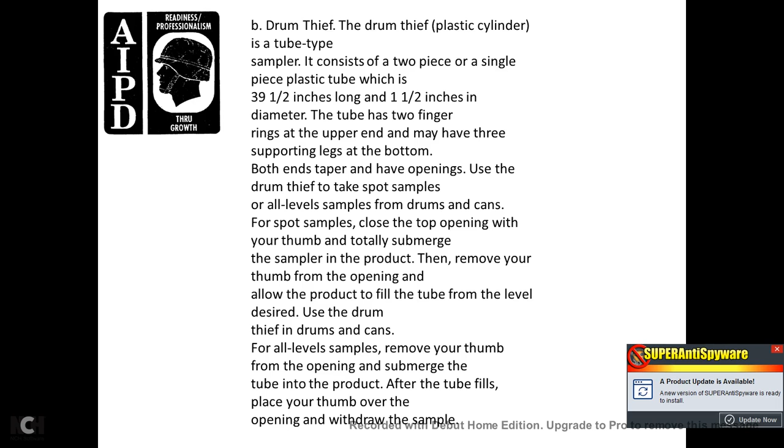Use the drum thief to take spot samples or all-levels samples of drums and cans. For spot samples, close the top opening with your thumb while the sampler is totally submerged in the product, then remove the thumb to allow the product to fill the tube at the level desired. When using the drum thief on drums and cans for all-levels samples, remove your thumb from the opening and submerge the tube into the product. After the tube fills, place your thumb over the opening and withdraw the sample.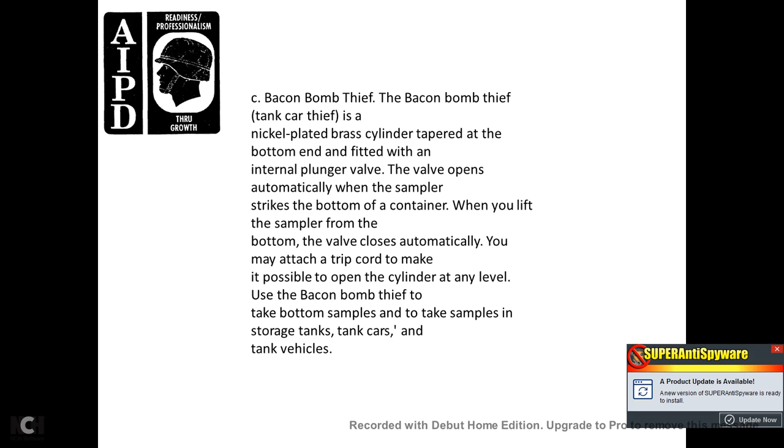The bacon bomb thief is the tanker car thief. It's a nickel-plated brass cylinder, tapered, with the bottom end fitted with an internal plunger valve. The valve opens automatically when the sampler strikes the bottom of the container. When you lift the sampler from the bottom, the valve closes automatically; an attached trip cord makes it possible to open the cylinder at any level. The bacon bomb thief is used to take bottom samples in storage tanks, tanker cars, and tanker vehicles.

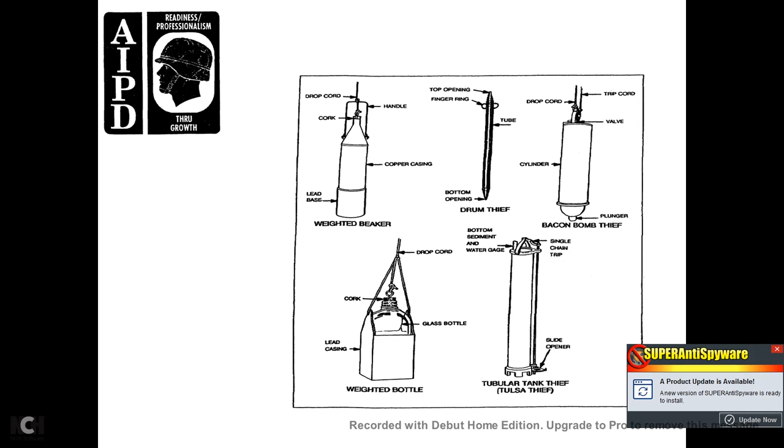The tubular tank thief, or Tulsa thief, is the bottom sediment and water gauge with a single chain trip and a slide opener.

The tubular tank thief, or Tulsa thief, is a metal cylinder open at both ends. When you activate the closure, you seal the bottom of the cylinder, trapping the product inside. The closing mechanism is activated mainly by tugging on the cord, or automatically by the sampler touching the bottom. Using the Tulsa thief, samplers take bottom samples in storage tanks, tanker cars, and tank vehicles.

Sampling packaged product: for packaged product, when you need a representative sample for shipment testing, you can obtain guidance as to how much product constitutes a representative sample from your Division Material Management Center, or DMMC. This is critical when dealing with packaged product submitted with the wrong samples.

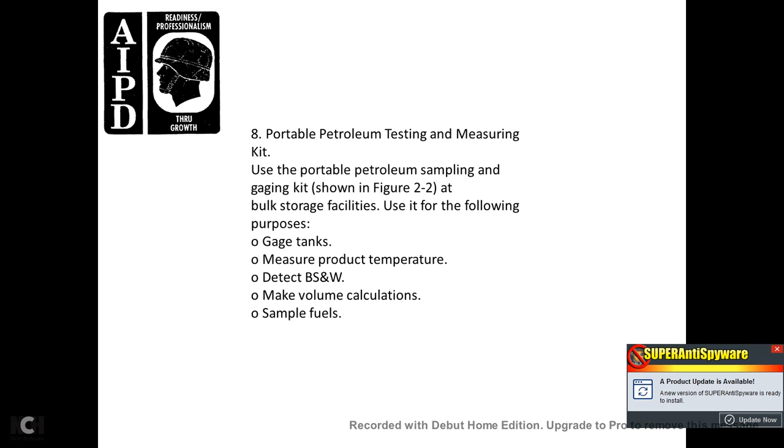Portable petroleum testing measuring kit: the portable petroleum sample and gauging kit is shown in Figure 2.2. Bulk storage facilities use it for the following purposes: gauge tanks, measure product temperature, detect bottom sediment and water, make volume calculations, and sample fuels.

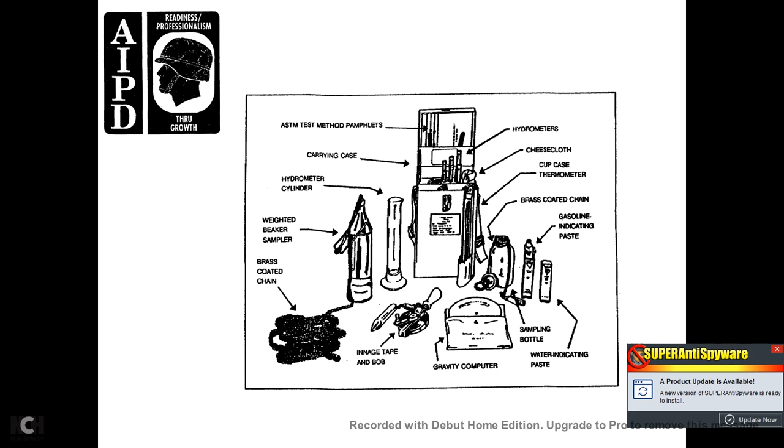The kit includes ASTM method pamphlets, a carrying case, hydrometer cylinder, weighted beaker sampler, brass-coated chain, innage tape and bob, gravity computer, water indicating paste, sample bottles, gasoline indicating paste, cup case thermometer, cheesecloth, and a hydrometer. You can find the kit reference in the Supply Catalog.

The kit number is 6680-90-CL-N01. It weighs 22 pounds and consists of an aluminum carrying case fitted with the measuring and sampling equipment. The major parts of the kit include an olive drab aluminum carrying case and a cup case thermometer with an 11 to 180 degree Fahrenheit range.

Additional parts include an innage tape and bob, hydrometers ranging from 19 to 81 API gravity, a hydrometer cylinder with a removable base, a weighted beaker sampler, a wide-mouthed sampling bottle, brass-coated chain, gasoline indicating paste, water indicating paste, cheesecloth, a gravity computer with case, and American Society for Testing and Materials test pamphlets.

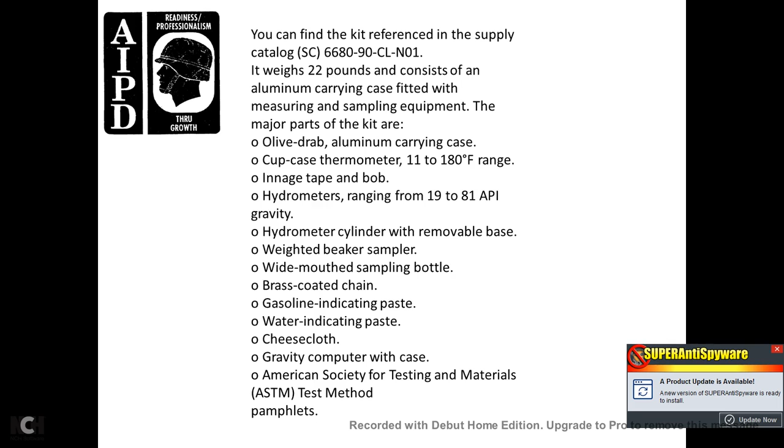Sampling and testing requirements are outlined in Military Handbook 200, which sets the minimum sampling and testing requirements for determining the quality of petroleum-related products. Responsible cognizant petroleum officers must maintain strict quality surveillance, and you may increase the frequency of testing depending on conditions, stockage age, storage age, and the type of product concerned, when increased testing conditions are warranted.

The types of tests used for petroleum products stored in bulk at installations or depots are type A, B1, B2, B3, C, solids (Millipore), flashpoint or explosivity, and visual checks.

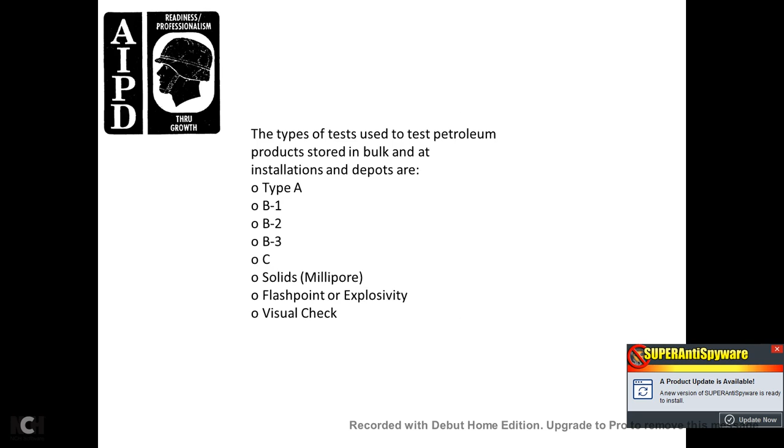Further to the publication, extraction Appendix B, Table A1 displays the minimum frequency of testing for various petroleum products. For example, Table A1 shows that dormant bulk and packaged diesel fuels require testing every 12 months. Table A2 provides information about the type of samples required.

When you finish the sampling type of test, perform the final steps per Table A, with a brief description of each test type providing additional information. Use the appropriate type of test on petroleum products, with the stipulation that the inspector examine the product at least annually, at the discretion of the owning and inspecting authority, with regard to the type of product, age, stock, and storage conditions.

Procedures: you cannot reduce the sampling to a simple set of procedures because of the many differences in petroleum product transportation, storage, and sampling testing. Contact your supporting laboratory for specific guidance on the following procedures.

Minimum precautions: use an approved sampler and approved containers. Ensure personnel properly clean sampling equipment and containers. Rinse the samplers and containers with a portion of the product being sampled to ensure the product is not contaminated with previous material.

Note that when a sample is sediment-tested, use only sample containers that have not been previously rinsed with petroleum; do not use a container rinsed with the product being sampled. Clean samplers immediately before taking a continuous sample.

Draw enough to displace all product within the sample lines. Take samples from the hose after discharging about two times the volume capacity of the hose. Do not fill the sample container above 90% of its capacity.

Seal it tightly, and use clean, dry, brown bottles to protect samples of gasoline, jet fuels, and kerosene from direct sunlight. Attach a completed DA Form 1804, Petroleum Sample Tag, to each container.